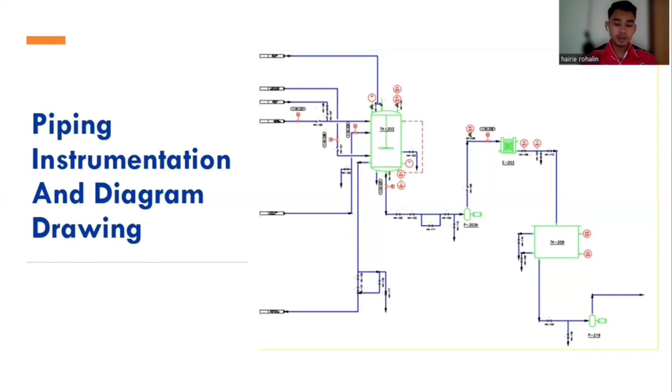In the polishing process, the objectives are to transfer the liquid from VE203 to T209 and return it back from T209 to VE203. The activity for the process from VE203 to T209 focuses on teaching students how to polish and wash from VE203 to T209.

Firstly, we check the initial pressure, temperature, level, and weight of the vessel that contribute to the objective of the day, tracing the pipeline. Updating the pressure, temperature, level, and weight of the vessel are all steps in the plant operating process. Communication with the control room will be made to monitor and update the process, guaranteeing accurate and timely data gathering and analysis.

The starting pressure, temperature, and level or weight of all vessels that contribute are verified before the procedure begins. Lines have already been traced, manual valves must be opened according to the order from the control room, and pressure, temperature, and level or weight readings must be updated every 2 minutes.

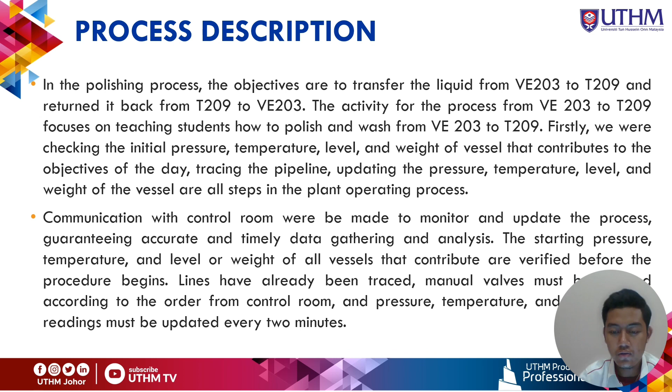Next, turn on the butterfly valve located near VE203. After that, give command to the control room to open AV237. Then, at the biodiesel plant, open 4 manual valves that contribute to the transferring process from VE203 to T209. After turning on all manual valves, give command to control room to turn on the centrifugal pump P203A, and actuator valve AV236 to start the transferring process.

In order to speed up the transferring process, MX203 is required to turn on to stir the liquid in the vessel. After that, manually check whether the liquid is entering T209 or not, and monitor the liquid level at VE203 by reading the value at the level transmitter. Next, the alarm will automatically ring, indicating that the transferring process from VE203 to T209 is already done.

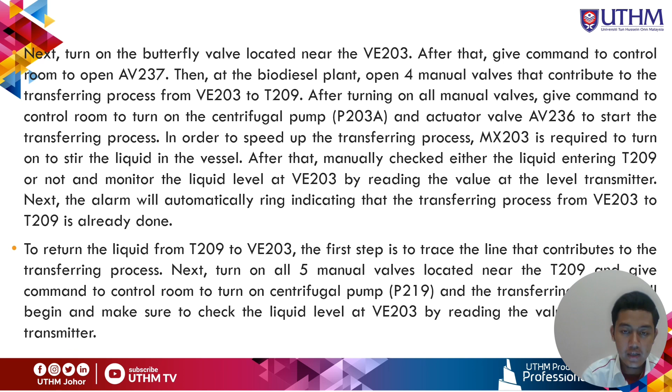To return the liquid from T209 to VE203, the first step is to trace the line that contributes to the transferring process. Next, turn on all 5 manual valves located near T209 and give command to control room to turn on centrifugal pump P219, and the transferring process will begin. Make sure to check the liquid level at VE203 by reading the value at the level transmitter.

To transfer liquid from VE201 to VE202, the first step is to take the reading of temperature, pressure, and liquid level in the vessel. Secondly, trace the line that contributes to the process.

After that, give command to control room to turn on AV215. Next, open two manual valves at the plant. After turning on the manual valve, give command to control room to turn on TV201 and MX201 to speed up the transferring process. Make sure to check the level of liquid in the vessel by reading the value at the level transmitter.

To transfer the liquid from VE202 to VE203, first step is to take the reading of the level, temperature, and pressure in the vessel and trace the line. Next is to turn on the butterfly valve to let the water flow.

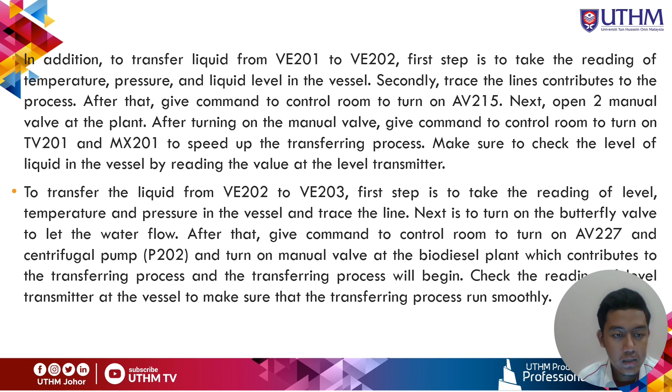After that, give command to control room to turn on AV227 and centrifugal pump P202, and turn on the manual valve at the biodiesel plant, which contributes to the transferring process, and the transferring process will begin. Check the reading of the level transmitter at the vessel to make sure that the transferring process runs smoothly.

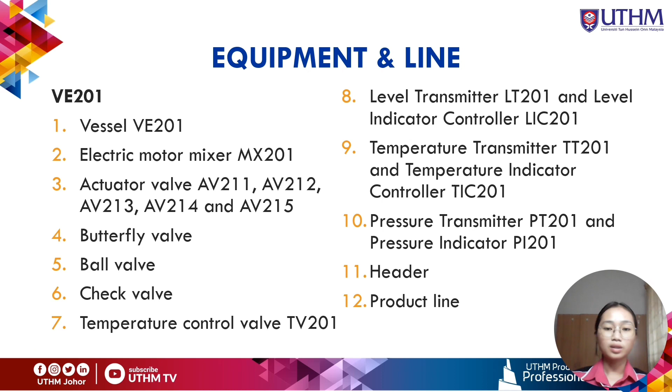For VE201, there's the vessel itself, electric motor mixer, actuator valve, butterfly valve, ball valve, check valve, temperature control valve, level transmitter, level indicator controller, temperature transmitter, temperature indicator controller, pressure transmitter, pressure indicator, header, and product line.

Next, for VE202, there's the vessel itself, mixer, actuator valve, butterfly valve, ball valve, check valve, temperature control valve, weight transmitter, weight indicator controller, temperature transmitter, temperature indicator controller, pressure transmitter, pressure indicator, pump, header, and the product line.

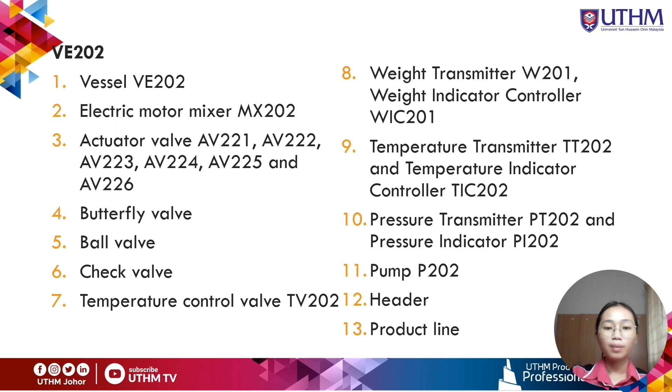Next, for VE203 and T209, there's the vessel itself and Y-strainer, actuator valve, butterfly valve, ball valve, check valve, side channel pump, heat exchanger, furnace, centrifugal pump, header, and product line.

So polishing and reaction are important steps in the process that involve VE201, VE202, VE203, and T209 to ensure that plant operation continues uninterrupted during equipment maintenance. Equipment arrangement and backup plans are required.

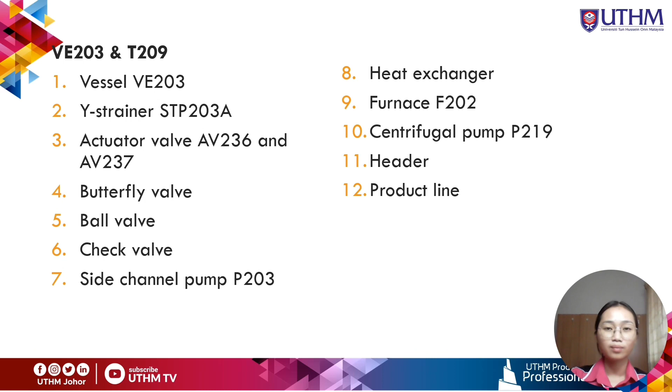For this reason, the system installs a bypass line at the pump and temperature and pressure control valve. Each control system also makes use of a feedback control system. That's all from me. Thank you.

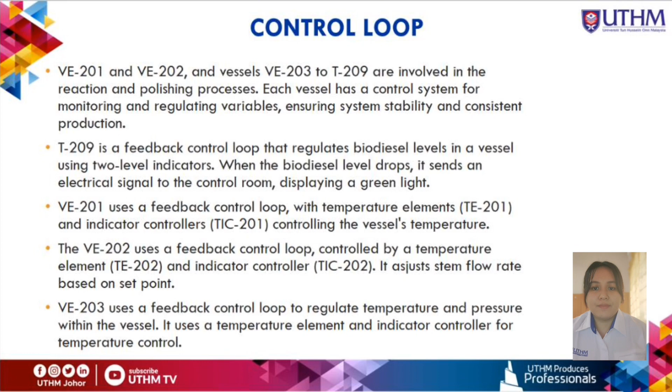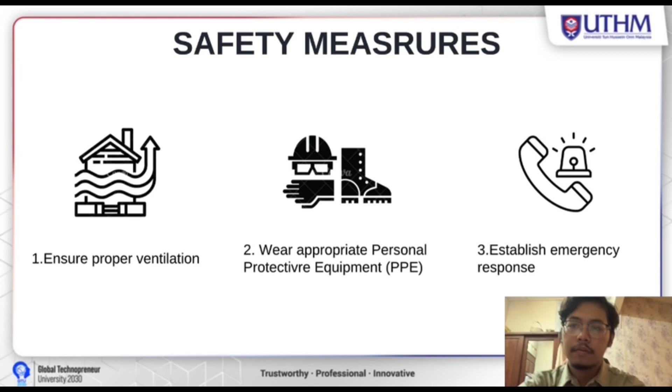Moving to the next safety measure, safety measure number four is fire extinguisher, where the biodiesel plant should have appropriate fire extinguishers strategically placed throughout the facility. Different classes of fire may require specific types of fire extinguishers to effectively suppress the fire.

Number five is eye wash station and emergency showers, where this facility is essential in case of accidental eye or body contact with hazardous chemicals.

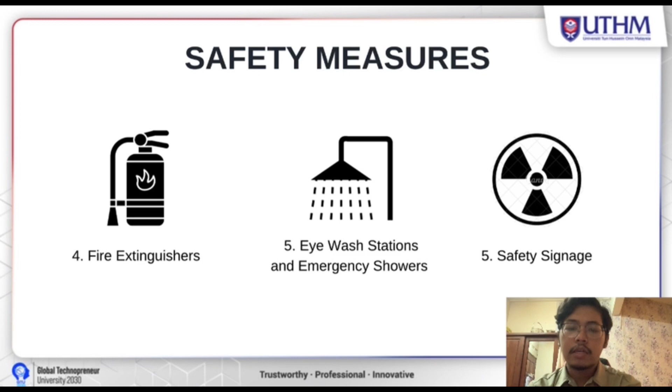Number six is safety signage, where safety signage is a clearly visible sign indicating safety procedures, hazardous areas and emergency exits, which helps to guide workers and visitors.

Safety measure number seven is emergency shutdown system, also known as ESD. An ESD system is crucial for pipeline safety, which we can find in the control room at the biodiesel plant in UTHM.

Number eight is pressure relief device. Pressure relief valves or pressure relief devices are installed along the pipeline to protect against excessive pressure buildup.

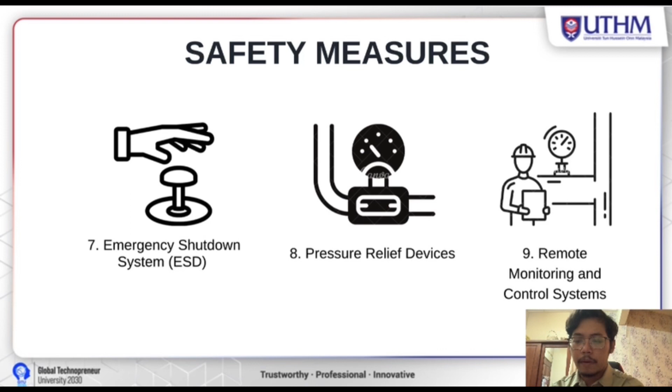Okay, so for the last safety measure is remote monitoring and control system, also known as instrumentation, where utilizing remote monitoring and control systems enables continuous monitoring of pipeline parameters such as pressure, temperature and flow.